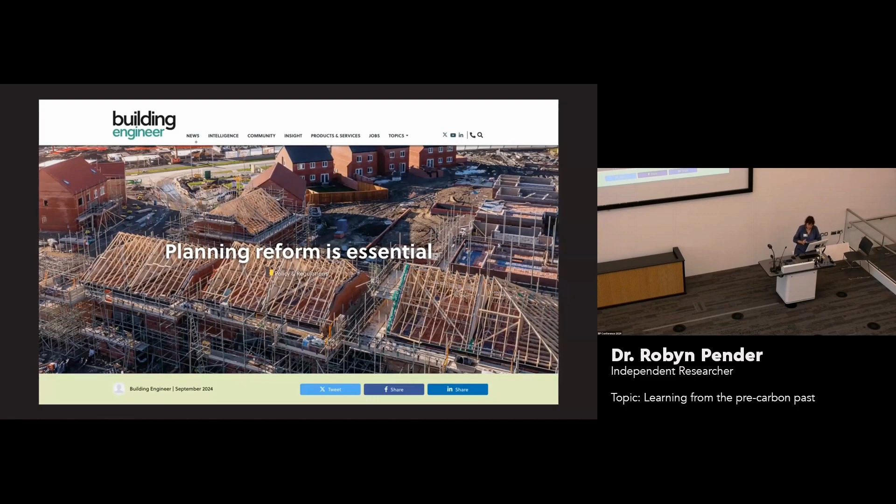This means going back to first principles in building performance and taking a much broader view of what that requires, because essentially it means looking not just at what's happening in terms of the envelope and the weather, but also crucially, vitally incorporating the people into the equation, the ways the building's being used, what the occupants are doing to support all those uses, because there's never just one occupant or just one use.

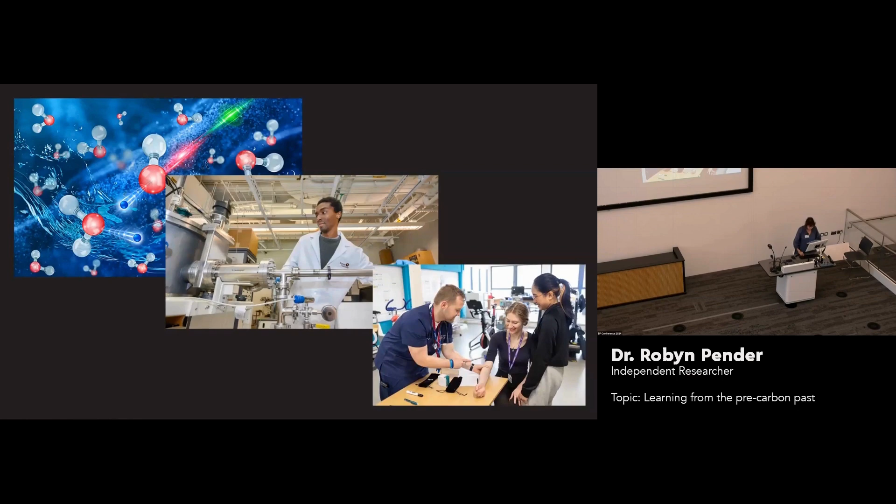There's a lot of important science behind all of this, the physics and the material science, of course, but also very much the biology, the medical science. Alas, as we've seen in the Grenfell report, we live in a world that has a strong tendency to conflate or even replace science with technology, with new toys, even though they're not the same thing at all.

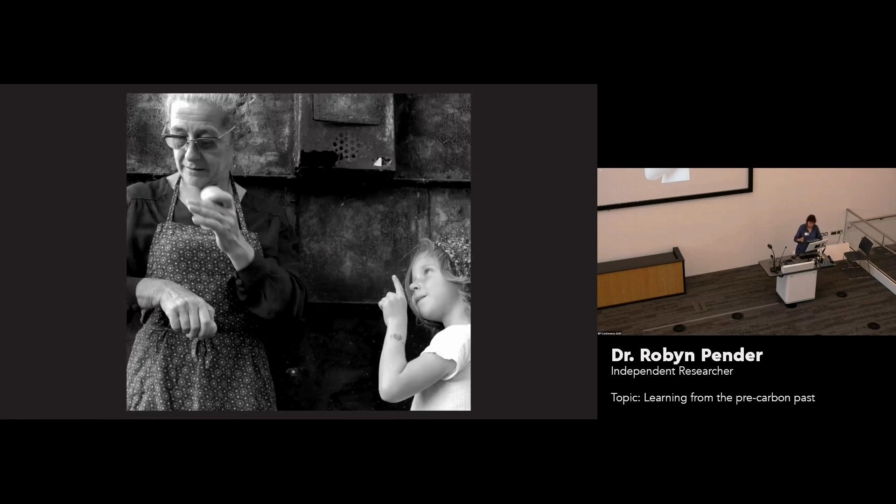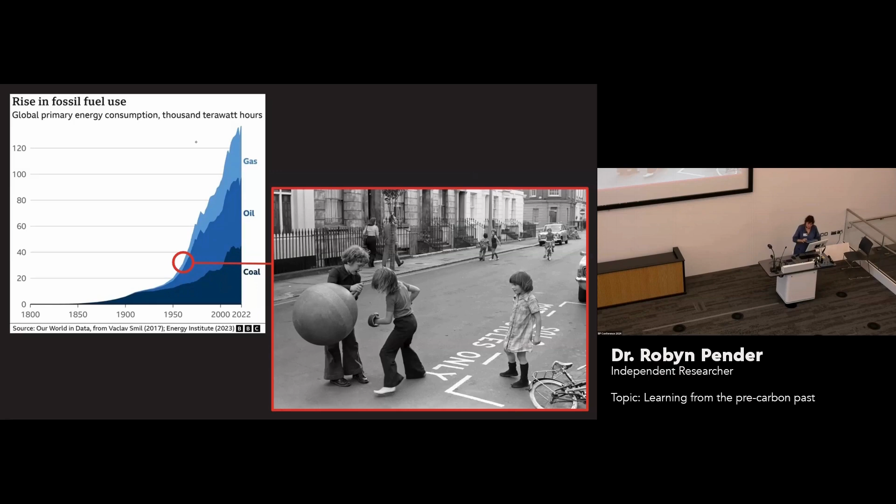I expect the medical science, at least, will be new to many people, although I guess also it really should have been our bread and butter as BP experts. Why it isn't, why it got siloed into medicine and ignored in building science, is kind of revealed by the third aspect we need to include, which on top of the science of the building envelope and of the people, we also have to understand the background history if we want to see what's been going on and why.

As specialists in building pathology, of course, we're all used to some extent to the importance of history. All of us know that the first thing to find out to understand patterns of deterioration is what's happened to the building in the past.

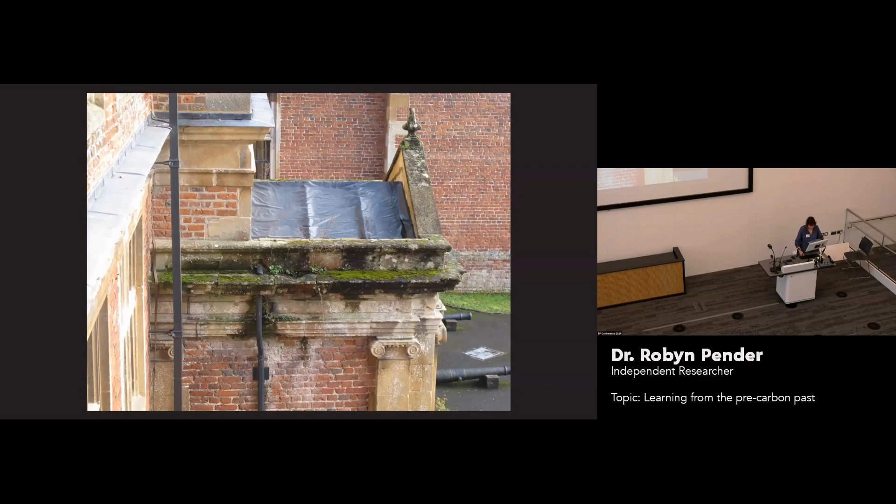We're also incredibly lucky to get the chance of working on buildings of all ages, from the very old to the very new. And that gives us an important familiarity that's really rare with materials and structures that are different to the glass facades that now dominate, and also a deep respect for just how good those older buildings can be. What I do want to stress, though, is that when people generally talk about older buildings, they seem to be thinking of these. But for me, these are all pretty recent.

I want us to go much further back into what we might call the pre-carbon built environment, when energy was seriously expensive and it certainly wasn't on tap. And that made all the difference, not just to the choices of material and design, but even more importantly to how the buildings were meant to be operated.

If you know from actual experience just how much energy it takes to prepare materials, to draw water, to make a rushlight, you don't waste. And it's waste that's clearly central to pretty much all our problems.

The deluge of fossil fuels and the miracle of energy and water at the flick of a switch quickly eclipsed hundreds, if not thousands of years of knowledge of construction and operation, and especially vernacular knowledge. And now we're paying the price for forgetting all the things that we used to know, not just in terms of climate change and all the other many self-inflicted catastrophes that are now making us feel like rabbits in the headlights, but also in terms of our own health and well-being.

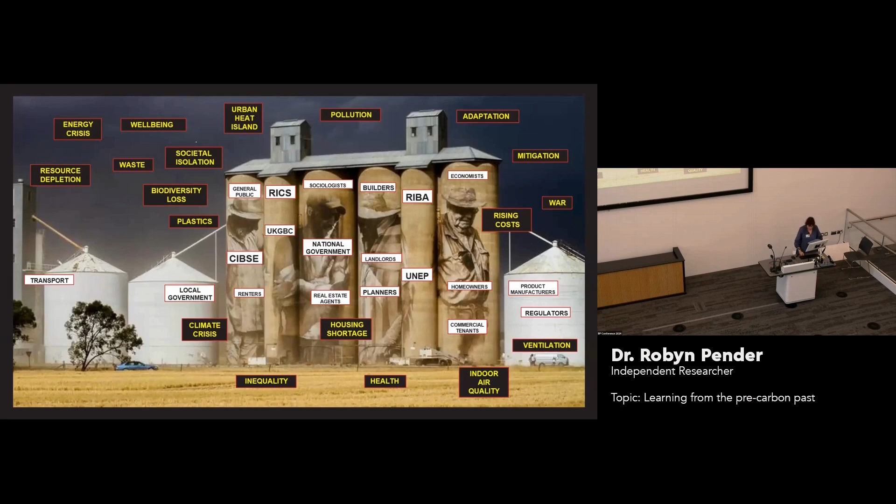Because as we know, the siloing of expertise seems to be getting worse and worse, but the built environment is complex. And so many of the things that matter most just fall into the cracks between those silos. That's in a nutshell what makes building performance assessments so powerful. We all come to this from disparate backgrounds, and that wide viewpoint's exactly what's needed.

Currently, the building sector as a whole just keeps focusing in on all those details, all the individual bits of the puzzle. But that's like a whole series of close-up snapshots, and nobody knows what anything has to do with anything else.

If we can get everyone to take a step back and look at the bigger picture more widely, more holistically, and really think about the underlying history and science, the whole panorama if you like, then suddenly it takes on a different form, and it's possible to see how everything actually interacts with everything else to make a coherent picture. So let's get stuck into that.

I'll get some of the basic building science out of the way first because it affects everything else. First and foremost, there are two basic and fundamentally different ways you can make an envelope that keeps out the weather and especially the rain. It's perhaps not surprising, they more or less equate with pre-carbon, pre-industrial, and post-carbon, the buildings that are based on materials and structures that require lots of energy to make and to run.

The old head of the Building Research Station in the UK in the 1950s, my hero Fred Measham Lea, brilliantly christened them in-house greatcoats and raincoats. And I've stolen his idea, which he doesn't seem to have ever published, unfortunately, because these names are terrific. They're a perfect analogy to help everyone, professionals and users alike, to really intuitively understand some very complex systems and easily make good decisions.

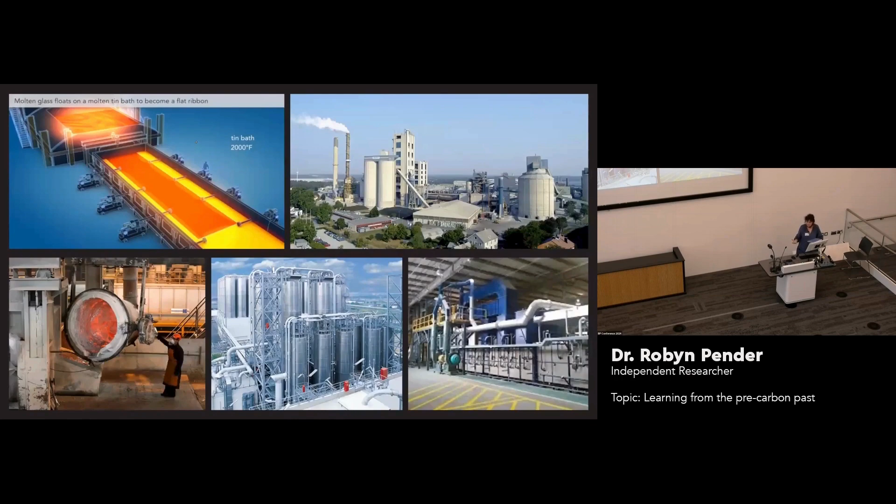It's easiest to start at this end of the timeline with the raincoat envelopes, which really get going after the First World War, probably because that smashed the old masters and apprenticeship systems for passing on knowledge. Raincoats are based on the idea of a waterproof layer using materials that are more or less impermeable, things like glass and metal and cement and engineering brick and plastic, all of which take masses of fossil fuels to make. When the water hits the raincoat, it just beads and collects and runs down under gravity.

Eventually it hits the bottom of the raincoat where it can soak in and create moisture problems. To make things worse along the way, it has to contend with the joints, and making these waterproof is really complicated because raincoat materials also expand and contract a lot with temperature change.

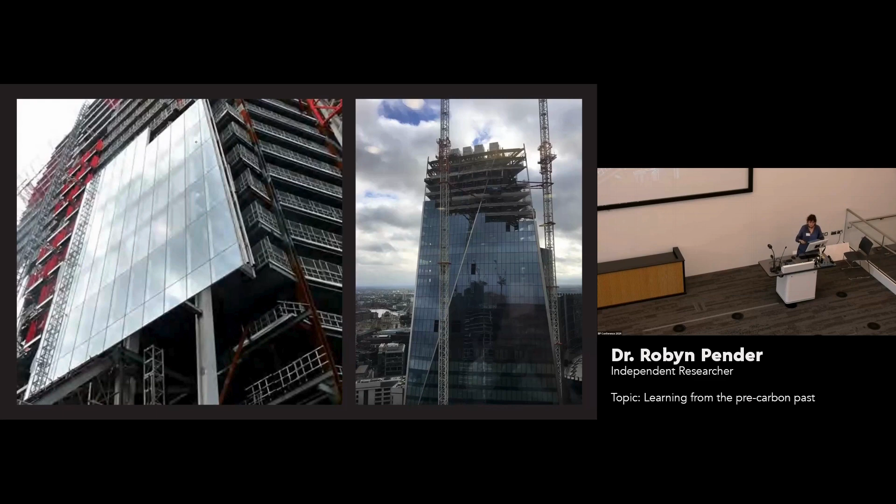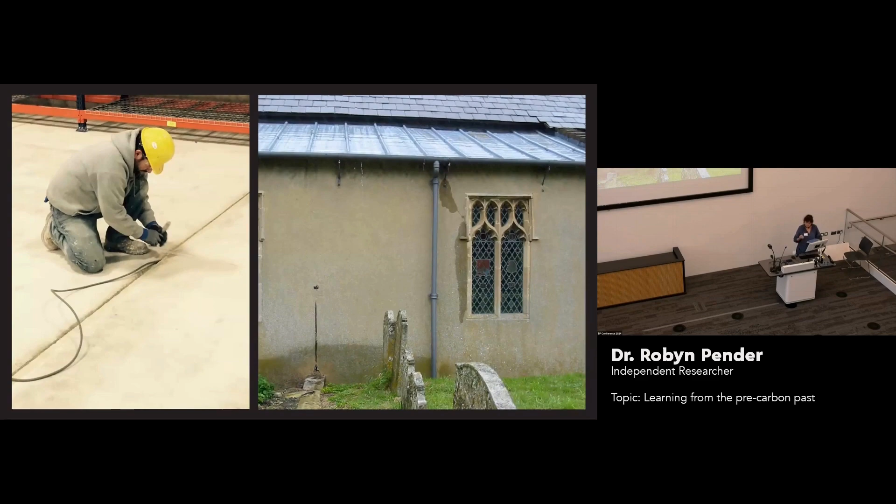So even something like cement or concrete, which you can smear over a large surface, still needs expansion joints or it will crack, unlike lime mortars. Actually, it'll probably crack anyway, and there'll be fine cracks too. And fine cracks and joints in raincoat materials make brilliant capillaries, so they suck through liquid water. The pain is, the harder you try to squeeze two surfaces together to seal them, the thinner you make the capillary. And the thinner the capillary, the better it is at wicking in the water and moving it about.

So making a joint that can take up movement and still stay waterproof is super tricky, especially at all those really complex corners and interfaces where you get lots of different planes meeting up. It's a nightmare. All this means if you're going to stop rain getting into the interior, raincoats generally need multiple layers, and all that layering makes them tricky to maintain.

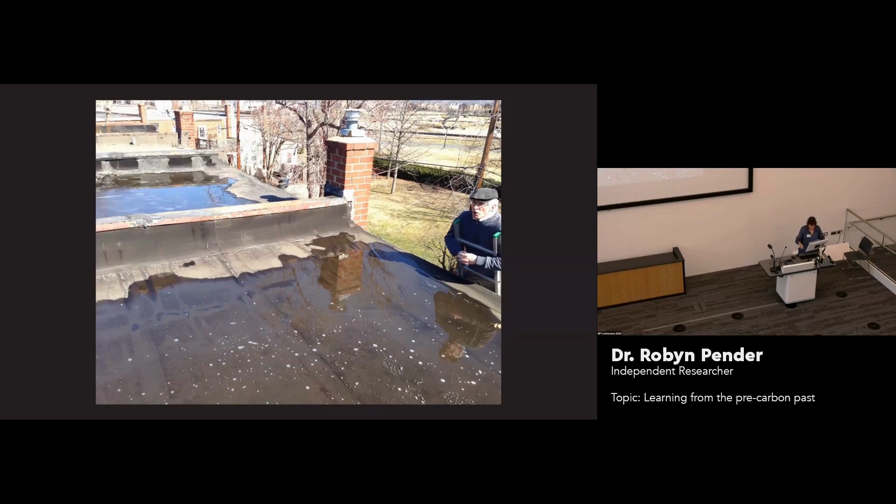The obvious examples are flat roofs. If you've got pooling water, it's probably going to wick in somewhere. And once it's inside, it's going to be moved about between all those raincoat layers. So it might appear on the ceiling a long way from where it came in. And that means locating and fixing leaks can be an interesting challenge.

And there's another problem with raincoats too, which everyone knows about who's ever worn a plastic mac in hot weather, or if the rain's got down the back of your neck. Once the rain's on the wrong side of that waterproofing, it can't get out again. And that could be penetrating rain, but it could just as easily be water from building use, condensation, or increasingly things like plumbing leaks.

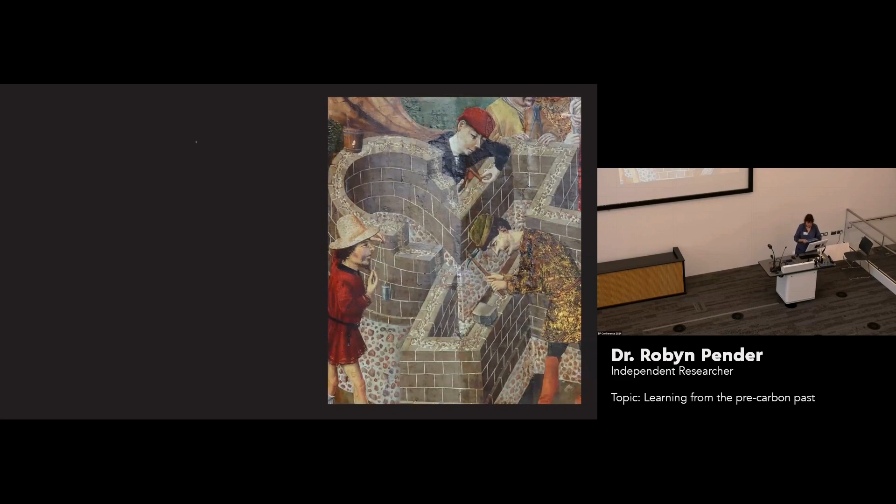Since raincoats take a lot of energy expensive materials and are tricky to maintain, I guess it's no surprise that the pre-carbon way of making building envelopes was completely different. It was greatcoats, mostly or completely made of porous and permeable materials.

Actually, we don't have a good word to describe how they work, because permeability is about saturated materials under pressure in a lab. And that's obviously nothing at all like the situation you've got in a real wall, where it's certainly not going to be dry, but the pores aren't all going to be filled with water either. So what you've probably got is some fine capillaries full of water, lots of pores full of air, and lots with a bit of a mix of the two.

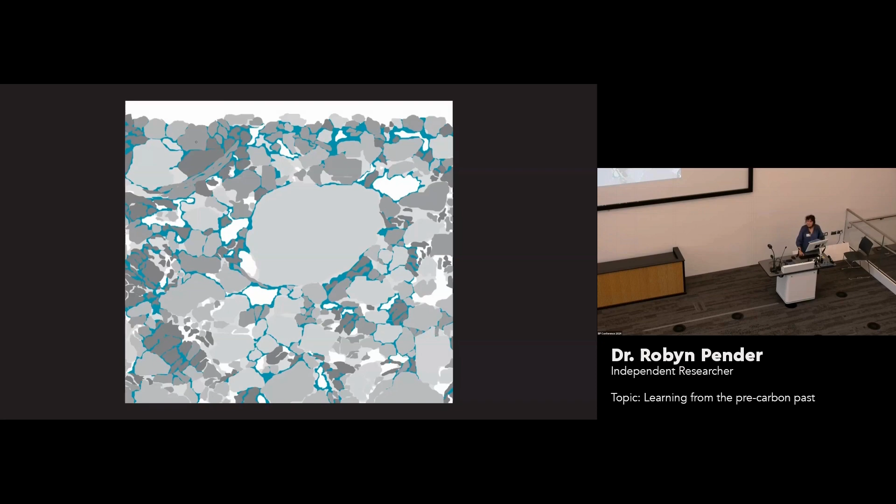So what happens when a raindrop hits a wall like that? Well, it's held in the surface pore it hits until it evaporates. It doesn't collect and flow down, and it doesn't get in further, because of the air it's trapping in the pores behind it. Air and water don't mix.

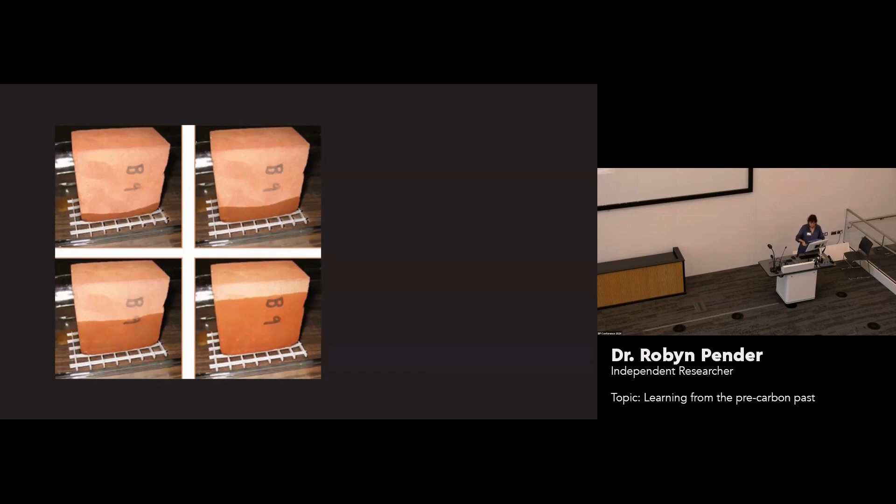It's the difference between putting a brick in a tray of water, where the air in the pores can escape and evaporation and capillary action can then pull the water through so the brick saturates really quickly, and dropping the same brick into a bucket of water so that the air in the pores is trapped by that water, and the brick will take weeks or months to saturate.

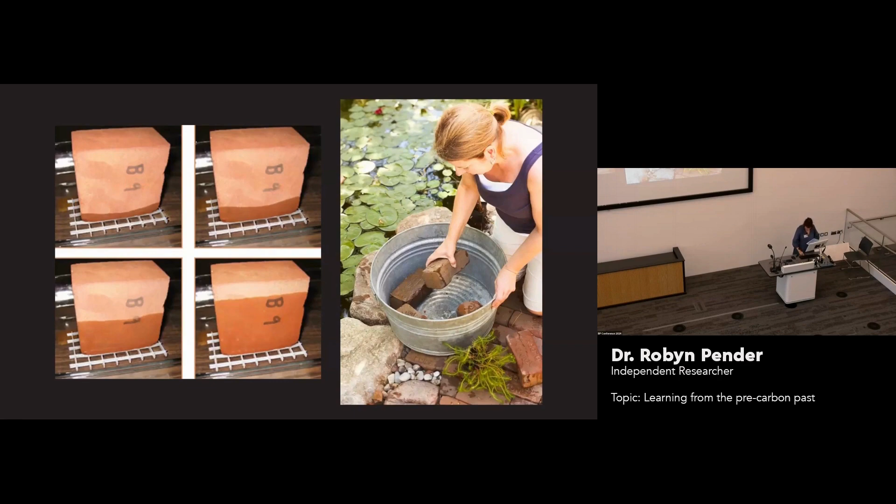And a brick in a wall is actually much more like a brick in a bucket than it is a brick in the tray. The only time a raindrop's going to get sucked into a greatcoat is if the pore it happens to hit happens to be the mouth of a capillary that's already filled with water instead of air for some reason. Usually it's something like a gutter leak or a flashing leak, letting water into the wallhead, or these days a plumbing leak.

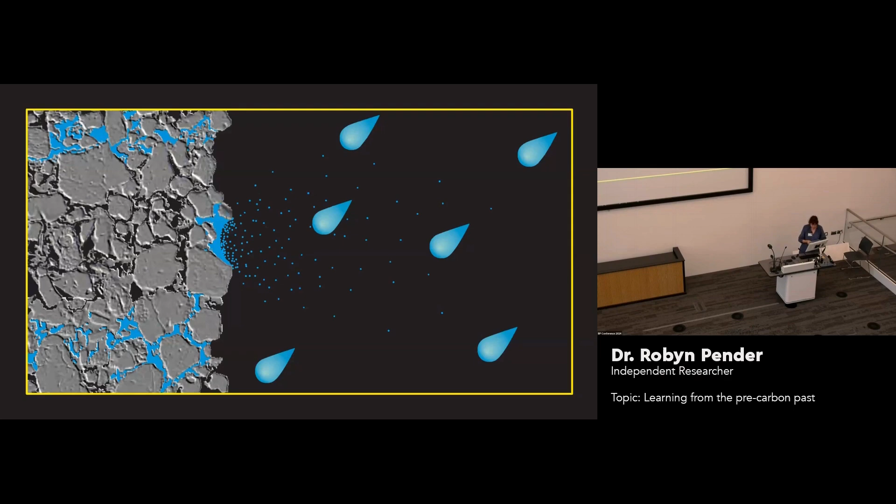Then the liquid water that's already there will entrain it. But as long as your building's in halfway decent condition, that's not going to happen very often, which means that the key to keeping a greatcoat enclosure working isn't at the surface, it's at the building scale. It's making sure that all that protective detailing is there to stop the rain getting into the fabric so you don't get too many capillaries filled with water.

So all those wide eaves, gutters, flashings, hood moldings, sills and drips, renders and lime washes, and so on. And vernacular architecture worldwide is characterized by these features because they work.

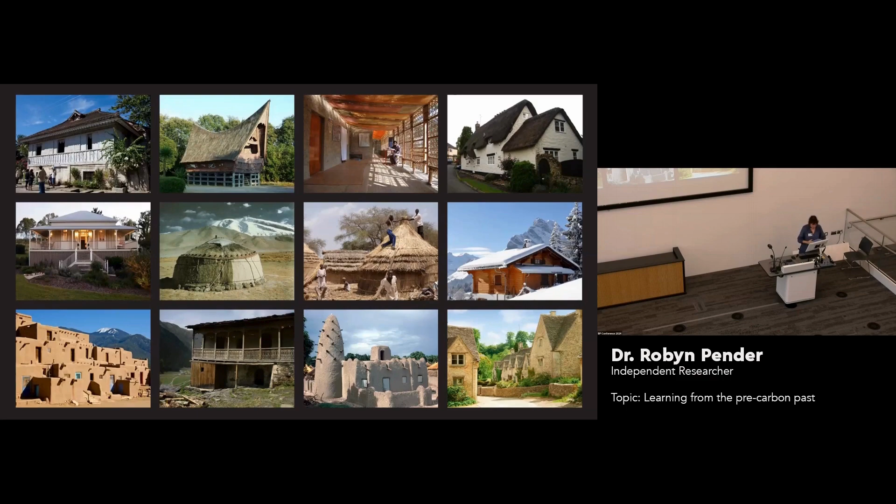Having water filling some of the capillaries out onto the surface isn't entirely negative, actually. In fact, it's critical to humidity buffering, the ability of greatcoats to modify swings in humidity. That's all about the water-filled pores at the surface, grabbing hold of the water vapor from the air when it's humid and letting it go again by evaporation when the humidity drops. If the fabric were perfectly dry, it wouldn't buffer, as Tim Padfield's shown.

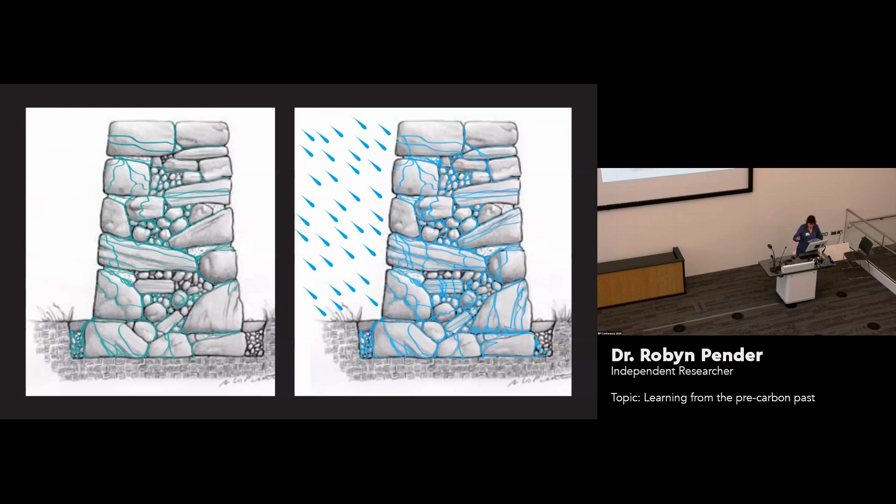But since any real wall is never going to be dry, we have a naturally great system. If water does get in too, that same system of capillaries can draw it out to the surface again so the wall can dry. We do need to remember, though, that the drying process itself does create more water-filled capillaries to the surface. So if your building's a bit neglected and water's getting into the core, then it's more likely that rain hitting the wall will be drawn in, and that creates more moisture-filled capillaries, so it's a bit of a vicious cycle. But even a very neglected building can dry out again. Once the source of that water is found and fixed, we've got plenty of evidence of that.

Where we really get problems is when someone tries to turn a greatcoat into a raincoat by covering a wall with something like a cement render or a plastic paint or a hydrophobic coating. The rain runs down the surface, then whenever it meets a small imperfection, crack, it's very likely to be sucked in. But the coating slows it getting out again, so the wall gets wetter and wetter.

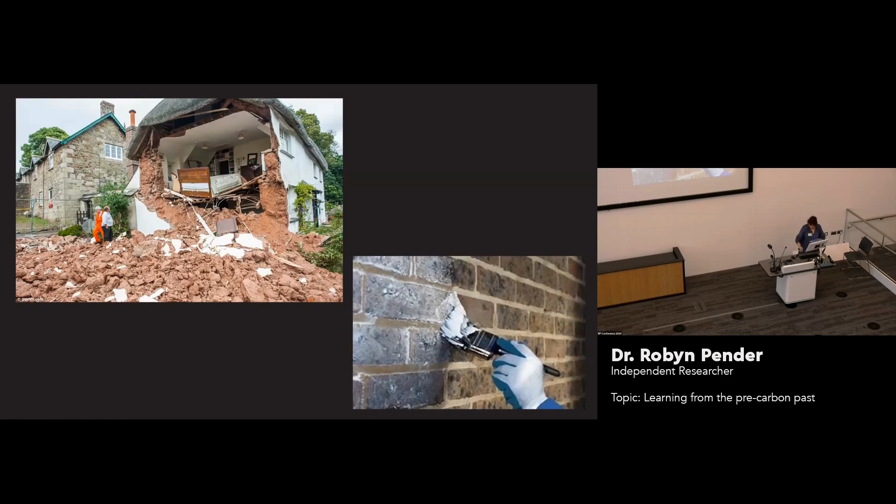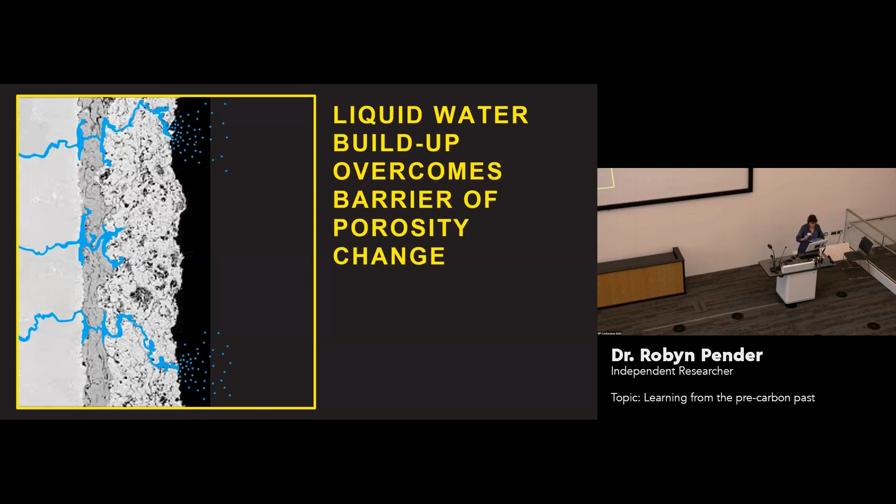And of course, any water getting into the wall from any other source is also trapped. It's really common to see blistering because the coating makes the pathway for water to the surface much more convoluted. So water builds up under the coating until there's enough of it to fill the pores and percolate around and find a way through to the surface.

Once it gets to the air, evaporation can then draw it through really super quickly. And that's kind of like tugging on a train of sausages, I think. The speed of evaporation breaks the liquid flow path, and that stops drying until you get enough water building up again to repeat the cycle.

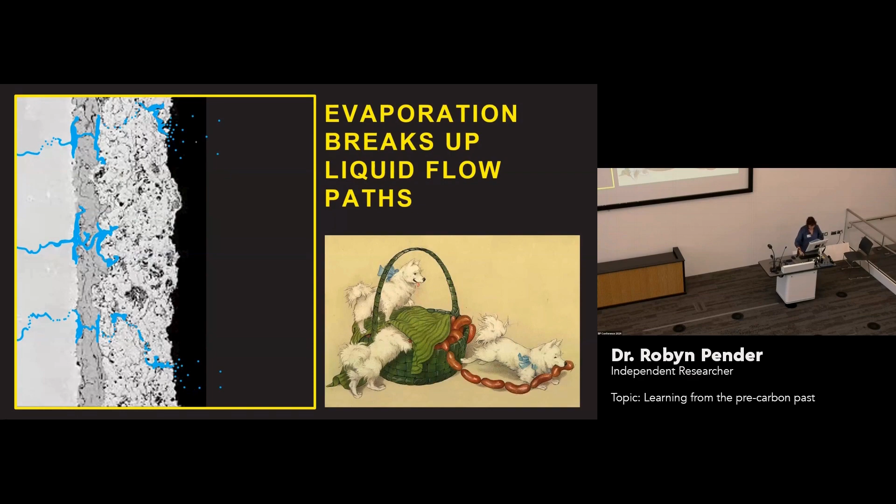But each time you break a liquid pathway, all the salts that are being carried by that liquid water are going to be deposited. So it's the ideal conditions for salt cycling damage under the coating, which is, of course, exactly what we see. Clearly, the phase change between liquid and vapor is a big part of the moisture story.

But unfortunately, there are lots of misconceptions around vapor at the moment, especially when it comes to the models used for some insulation calculations. Not least, there's an idea that vapor can and does pass through permeable materials, so it's worth setting out the reality.

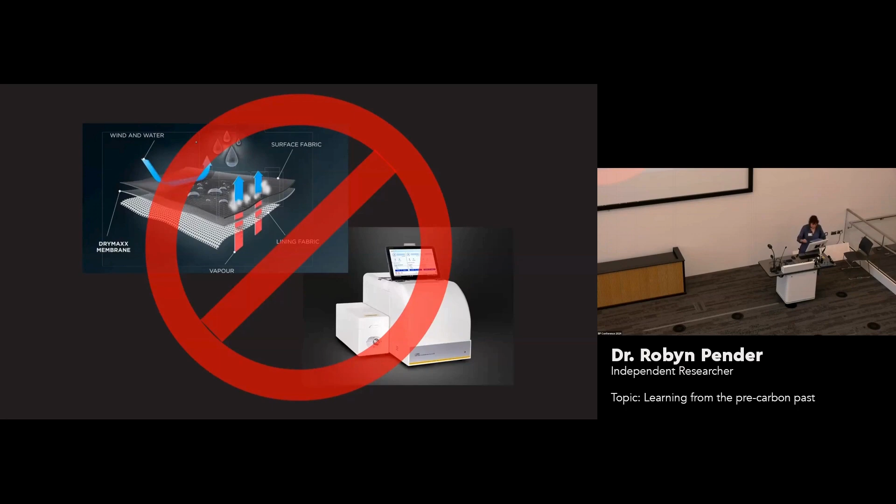With thermodynamics, you can easily show that vapor molecules can't get through porous materials and that the vapor transmission tests are actually recording the transfer of condensed liquid. But perhaps it's even more convincing to get this across to people who aren't BP experts if we just set it out in first principles. So when it comes to vapor transfer in free air, it's of course absolutely the case that water molecules move from areas of high pressure to lower pressure.

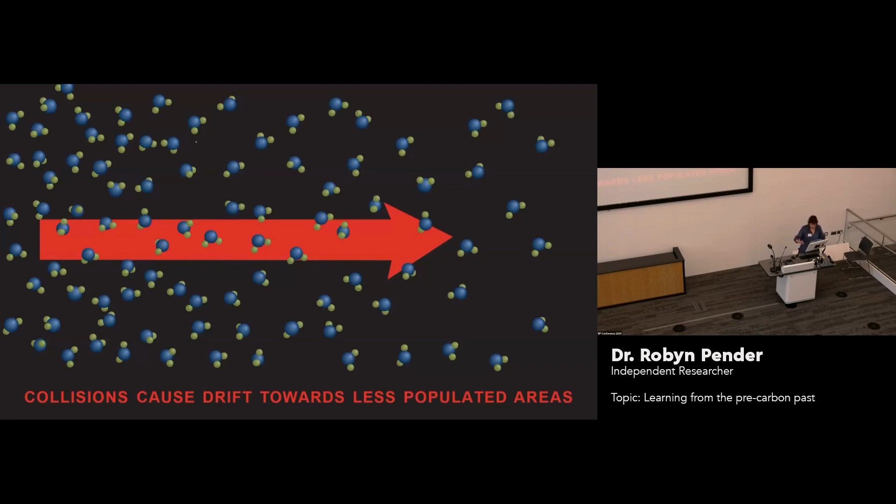That's just the natural result of collisions over time. But I think there's a common misconception out there that individual molecules somehow make a beeline for lower vapor pressures. It's inherent in the Rowley-Glaser model, which suggests that vapor pressures on either side of a wall will drive vapor through it. Well, if you're thinking of the big voids in rain screen walls, you might get some mileage from thinking of vapor moving from void to void through big gaps.

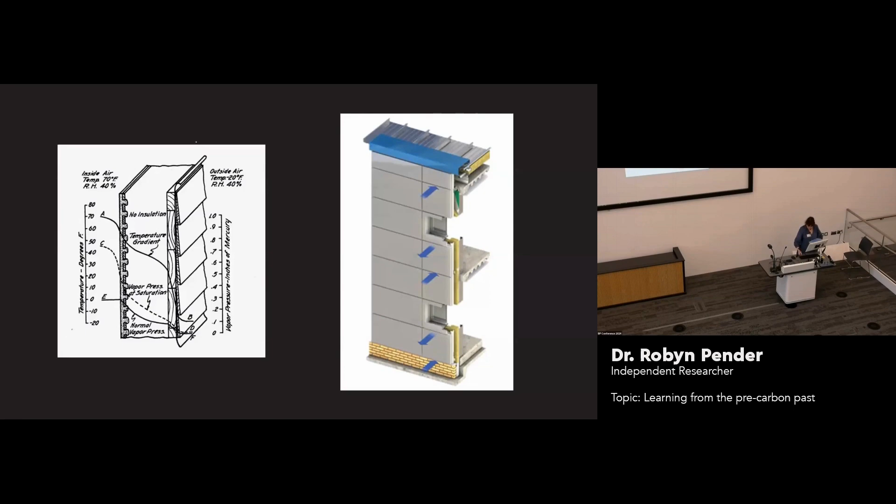But it's not useful at all for water vapor in pores, even in so-called vapor permeable membranes. If you imagine a water molecule in the air traveling into the pore of a porous material, it'll keep going straight until it hits a pore wall, and then it's going to lose some of its kinetic energy. If it doesn't condense immediately, it'll bounce off and head in a different direction until it hits another part of the pore walls, losing more energy.

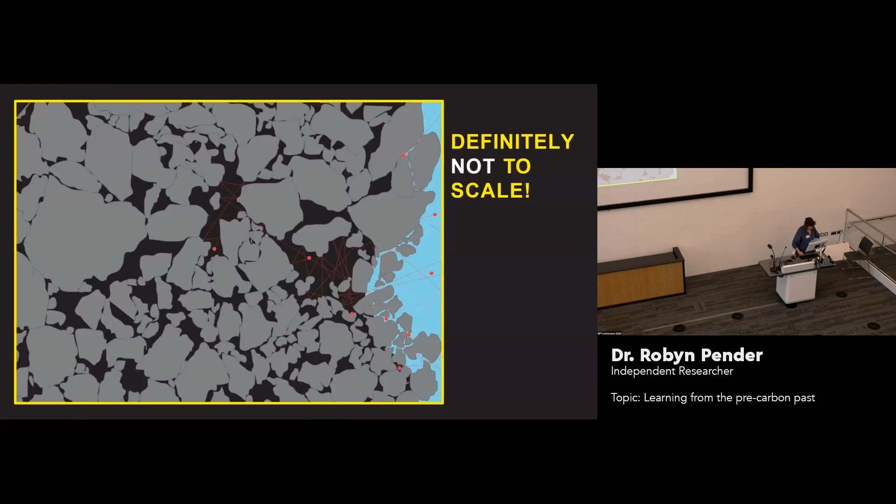So condensation happens really quickly. Vapor getting in from the exterior is going to condense within the first pore or two from the surface. But that molecule might attach to other condensed molecules or water already in the pores. The resulting liquid can easily be moved around the pores by capillary action, gravity and percolation, and might even be drawn right through the material and evaporate out the other side.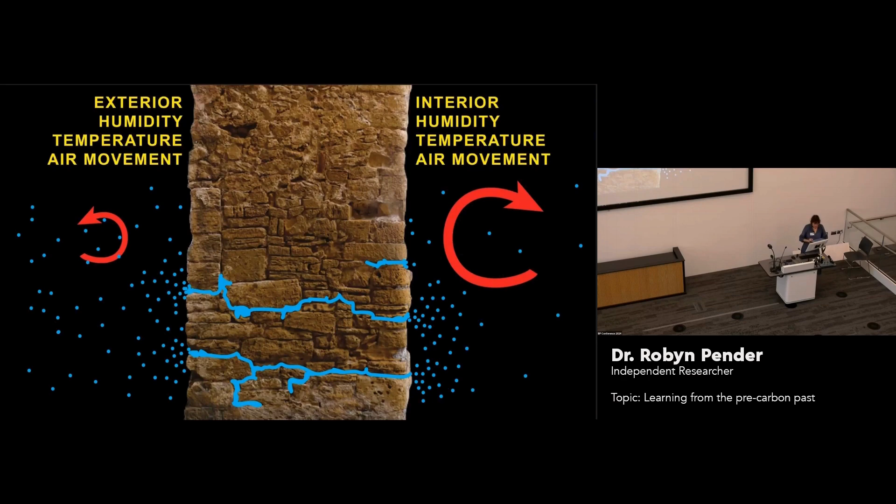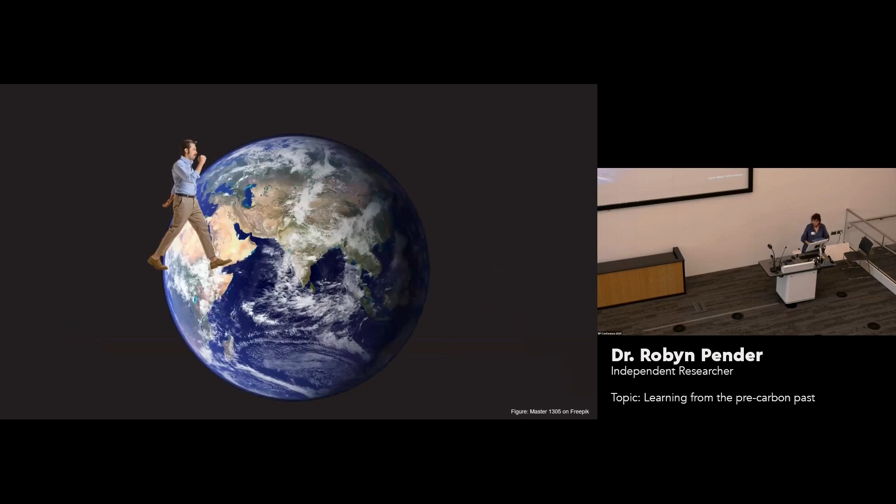This is what happens with driving rain. But it's only going to move in the liquid state, not as a vapor, no matter how thin or porous the material is. If you compare the tiny size of a water molecule to even the thinnest Gore-Tex membrane, even if the molecule somehow magically traveled in a straight line without colliding with anything, which isn't going to happen, the distance it would need to travel is equivalent to a person walking once right round the equator.

So if you could look inside the pores, you'd see molecules evaporating and condensing all the time, but that's completely independent of the conditions outside the wall. The water vapor inside a pore will only see the immediate pore walls and contaminants, only its local environment. The relative humidity, temperature and air movement outside aren't going to have any effect. But if you've got liquid flow paths connecting to the exterior, then exterior conditions can certainly drive movement of water. And that's not just semantics.

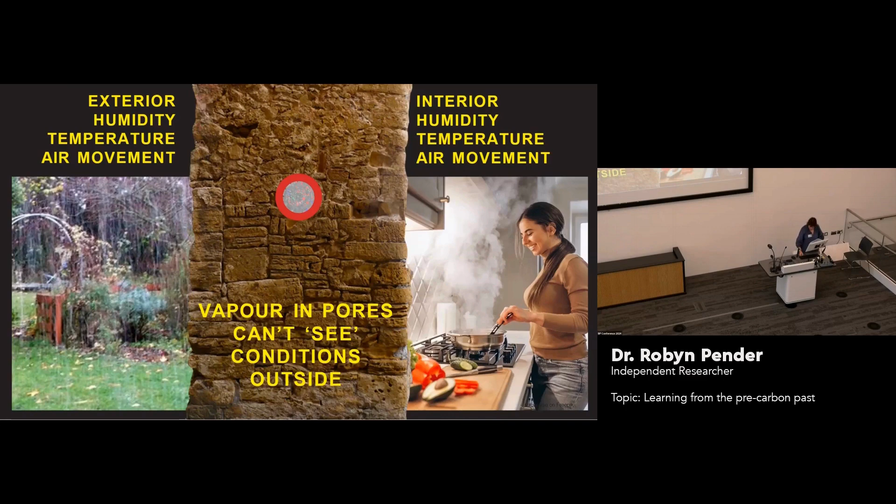The difference between liquid and vapor is critical for understanding drying, because to get water from the core of any material out to its surface, you need an unbroken liquid flow path through a capillary or interconnected pores. Just like overcoming the barrier of a surface coating, the moment you start to remove water from the surface faster than it can travel from the core through what's probably a pretty tortuous pathway, you risk breaking that liquid flow, and drying essentially stops until natural processes like condensation and percolation reestablish that liquid continuity again, hence stage 1 and stage 2 drying.

Which is why building performance expertise is critical for explaining to impatient clients why slow and steady actually wins the race when it comes to drying walls after flooding.

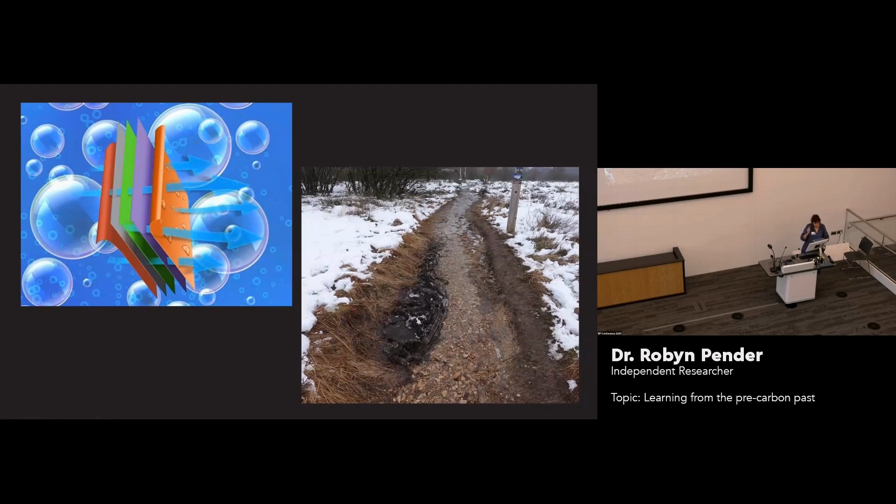The realization that models like Glaser are quite wrong in terms of the physics does raise the question of building membranes and what it is they're meant to be doing. I think the answer is it's often unclear what their intended purpose is. People are adding them in just in case, which is actually really dangerous, especially for greatcoats. And even when the purpose is clear, like keeping rain out from insulation, it's not necessarily clear that they're really up to the task.

Perhaps with enormous care and attention to detail, you might get a couple of decades out of the best of them. But what does that mean for care and maintenance? How would you know when this membrane was starting to fail, and what would you do when it did?

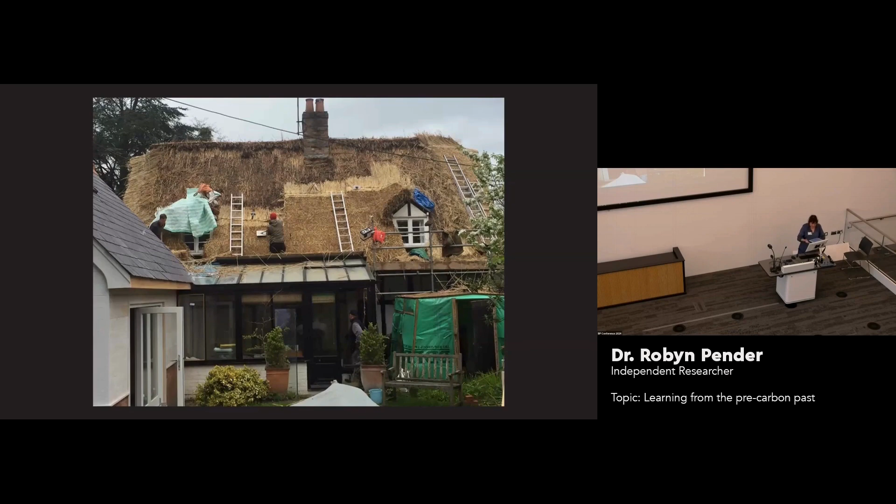So for me, that raises an important general point, which came up yesterday too. For all materials, old and new, that we might want to use on a building, I would argue that as a minimum, we really have to know as much as we possibly can about its failure modes, so we can say whether or not it's the right material to use in any particular case, and then what we need to put in place for future care and repair.

Leaving this to the manufacturers just won't cut it. It needs building performance expertise to see how any addition behaves as part of a system out there in the real world. The big reason we're so confident about traditional materials and systems is that we do understand what makes them fail and how to prolong their lifespans quickly and easily.

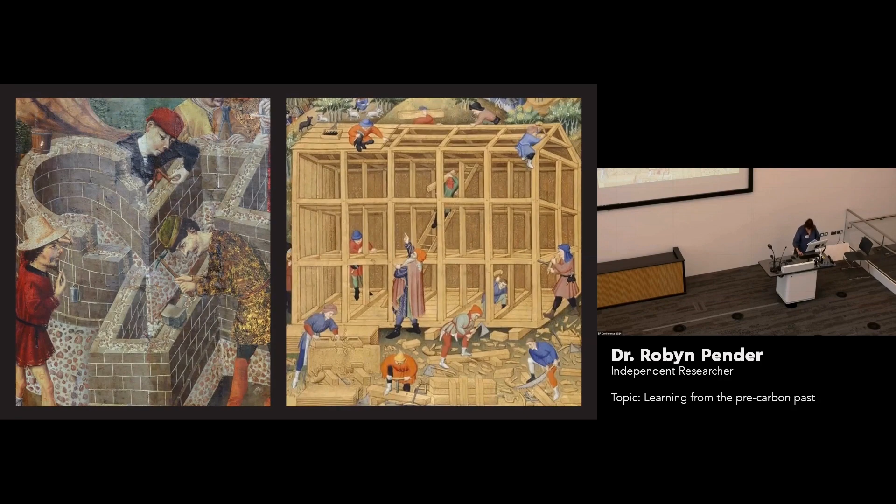Having established that greatcoat systems do work brilliantly, you can understand why they were the only way of building envelopes until very recent times. Raincoat materials like lead sheet first appeared very rarely and were used very sparsely.

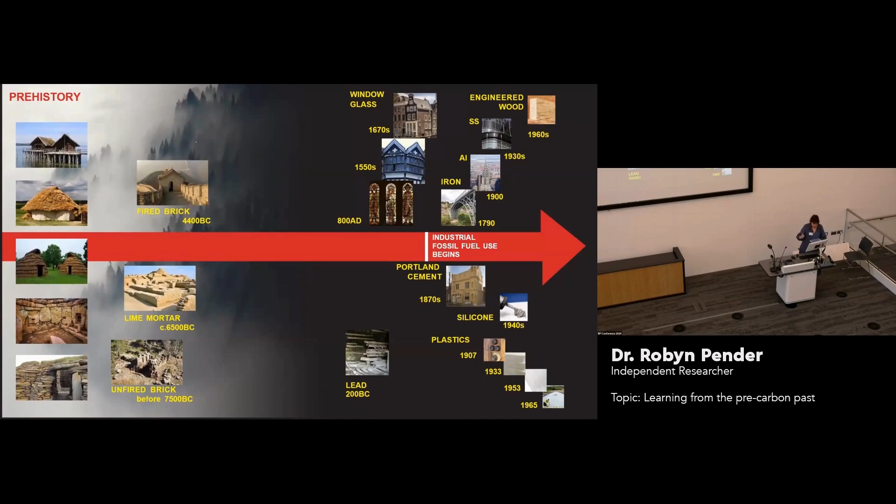One of the things that's so striking to modern eyes about this timeline is how terribly late glass comes in as a material. It's so common to us now that we assume it's always been there. There are some really excellent reasons it didn't appear earlier. The chemistry and technology are incredibly complex, but the essential problem is how much energy manufacture takes. That made it phenomenally expensive.

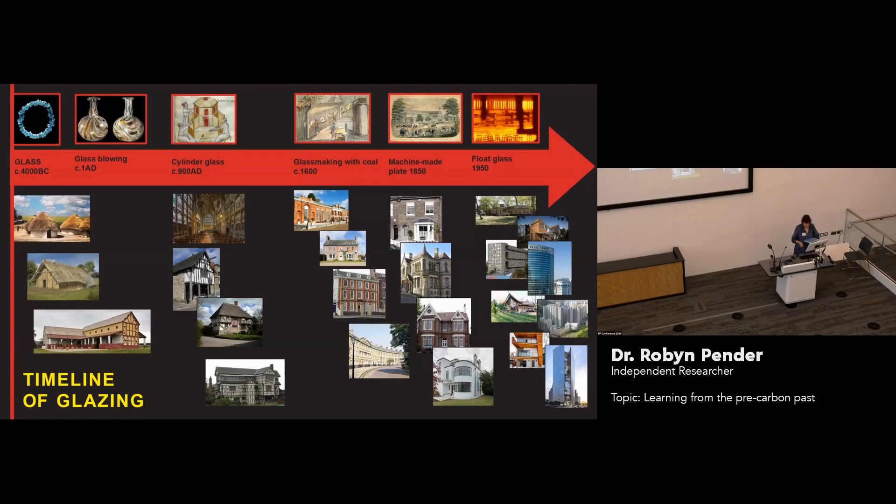And for the first few hundred years after window glazing was invented in about 900 AD, it was pretty much exclusively the property of the church.

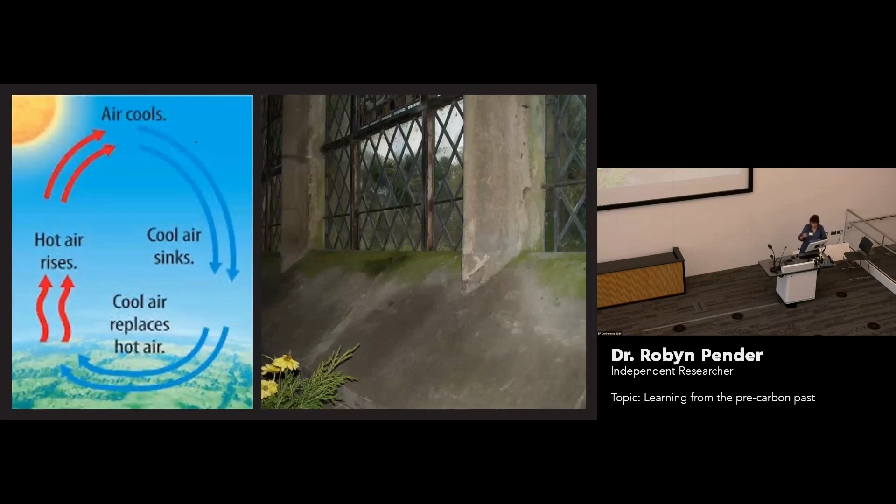They also, of course, got new problems of discomfort for the occupants, especially downdrafts caused by the interior air being chilled where it met the glass. But they worked out very quickly what to do about that too, as we know, because we have thousands of wonderful medieval images to show us, even though they never actually bothered writing it down, because it was something everyday. It made simple common sense to them.

But before I point out to you exactly what it was they did, we need to dive into some medical science, as I promised. And it's thermal physiology, how we physically interact with our surroundings to keep our metabolic processes working properly, to keep us alive, in fact. We in the buildings world seem to have developed some really weird ideas around this over the past 100 years or so. So again, it's very much worth going back to basics.

The basic thing is that we aren't like cups of coffee, just passively losing heat into our surroundings until our skin's at the same temperature as it would be if it were just thermodynamics, although most of the modeling assumes that's how it goes. Actually, we're warm-blooded, and like all warm-blooded animals, we're the heat source. We evolved an incredibly complex thermoregulatory system designed to turn most of the food and oxygen we take in into heat to keep our vital organs at exactly the right temperature to work properly.

If the brain, the heart, the lungs, and so on go outside a really narrow temperature band, it's less than a degree either way, the cells start to die and so we die too. But since we're continually generating heat, we will always need to be losing some of it, even if it's very cold, just not too much. So we have incredibly clever control mechanisms for getting that balance right. And it's a dynamic balance. It's changing all the time as we move around, as our surroundings change, as we do different things.

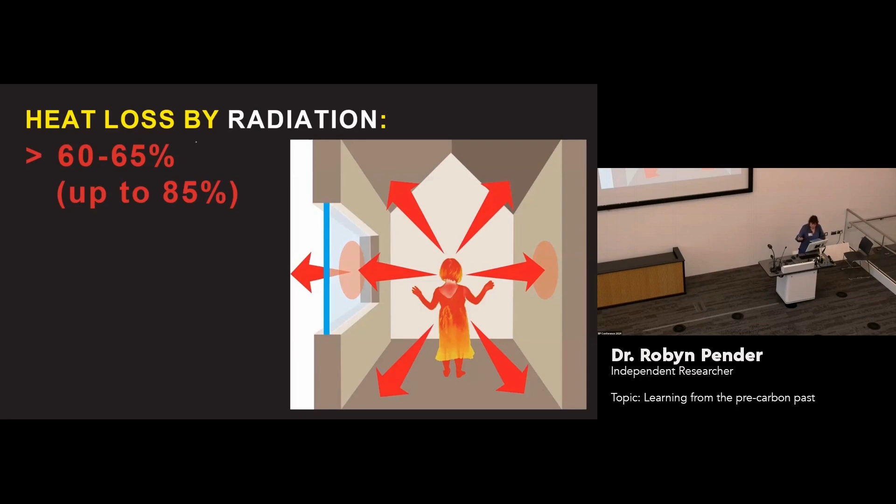That's at least 60–65% of our heat loss. But if we're wearing light clothing and we're surrounded by surfaces that keep absorbing our heat—glass, metal, stone—that can go up to as much as 80–85%.

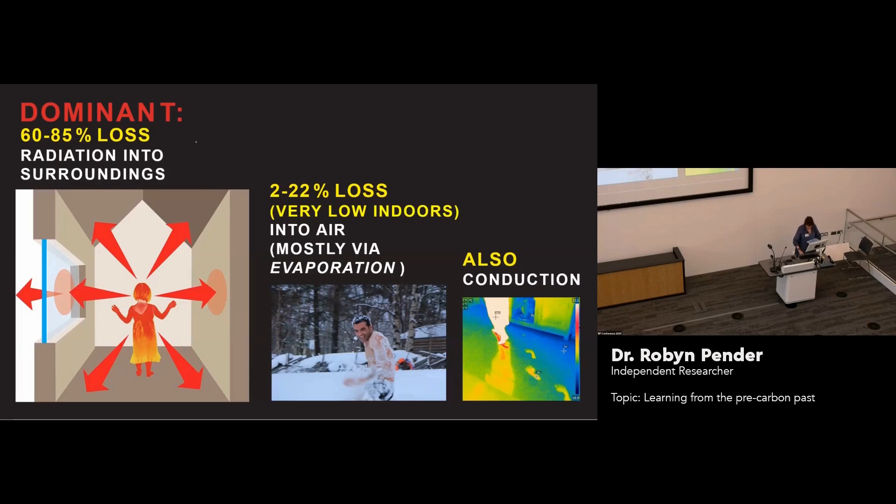So at the moment, we concentrate pretty much exclusively on that tiny amount of heat we're exchanging with the air, even though radiant loss is infinitely more important for comfort. Currently, it's almost entirely neglected in the way we design and operate our buildings in the global north, which is predicated on controlling air temperature. But that's a red herring.

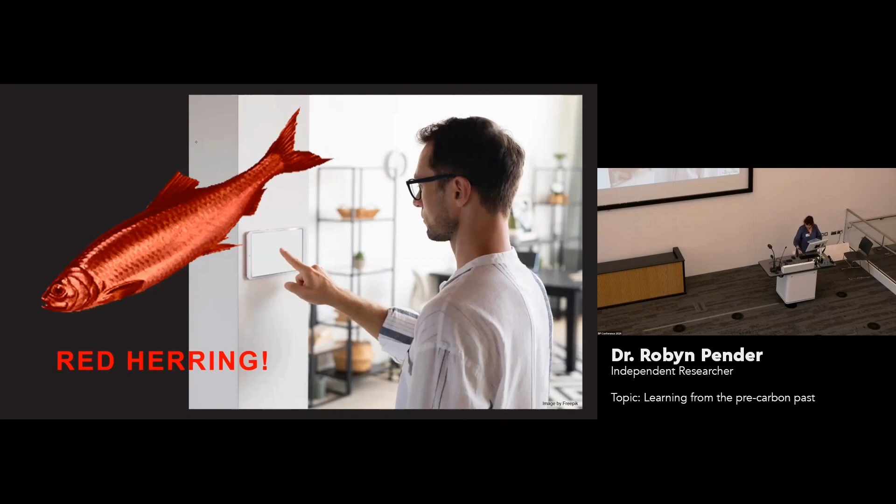Pre-carbon, they took an entirely different but extremely effective approach to thermal comfort that was almost entirely passive, which is our cue to introduce the strand of history.

Now, in the pre-carbon past, no, they didn't use fireplaces for thermal comfort, except incidentally. That's a post-carbon idea—it's Victorian, and it's perpetuated by a million video games and television programs. The genuine medieval images show us the enormous fireplaces being used for tiny fires for cooking. They are that size to make sure they got rid of all the combustion gases.

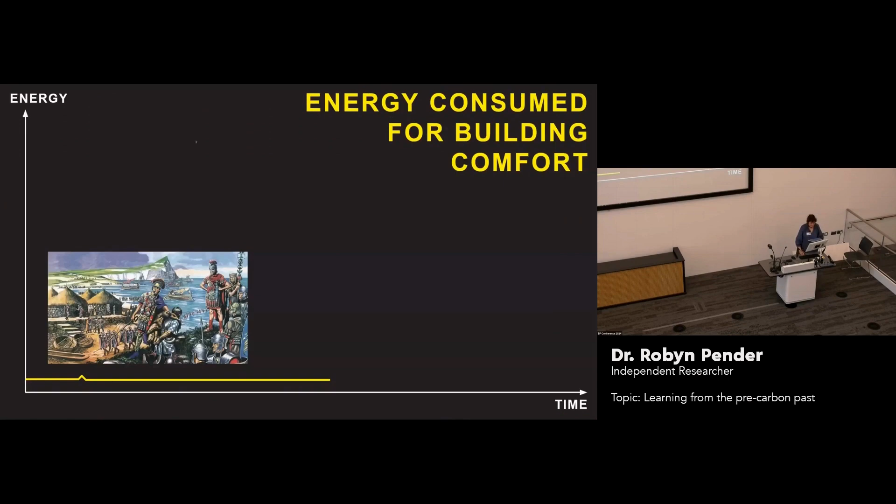And when they're not used for cooking, the pictures show us they were sealed over with panels, settles, and cloth. Now, we did get a bit of a blip in the UK of energy being used for heating when the Romans came to the frozen north.

They didn't know how to build for the British climate, and they didn't know how to dress for the climate either. But instead of following the natives with their trousers and thick earth walls and those passive tricks I'm going to get onto, they decided to try and transfer the hypocaust system from their bathhouses back in Rome into their ordinary villas in England.

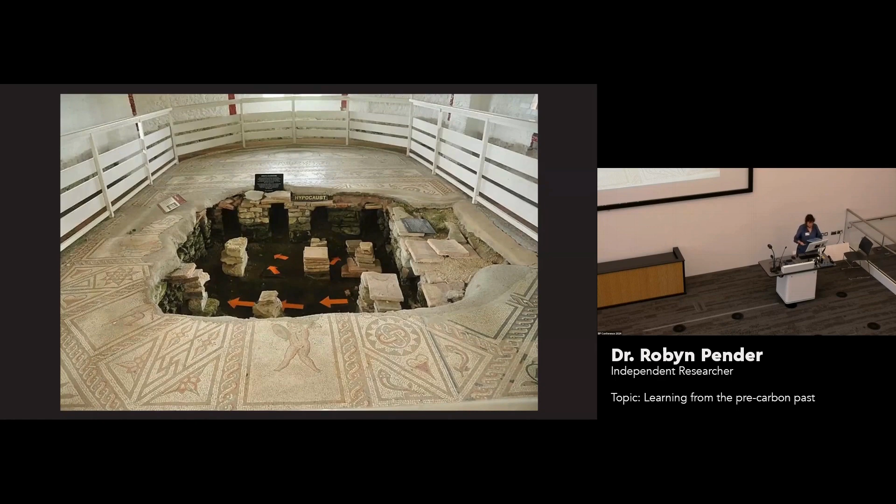The Romans are just so much like us in so many ways—the original global north know-it-alls, addicted to technological solutions to non-technological problems. They used so much charcoal, burnt so many trees to run this. It was really completely unsustainable, and it actually won't have worked all that well.

So it's no surprise that when the Romans left, the locals went straight back to what they'd been doing for centuries. And what they were doing and kept doing was this: slashing that huge component of radiant loss directly by just putting up simple barriers between their bodies and all the heat-absorbing surfaces around them.

They used draperies and canopies and rugs that could be put up in winter and stored away in summer, when some radiant heat loss was actually really useful—and not necessarily over all the surfaces, often just where people were sitting working quietly.

Even better, the draperies weren't one-trick ponies—and I think when energy is costed properly, you don't have one-trick ponies. At the same time, they could be using them for draft control, to stop or channel air movement, that next big contributor to comfort and discomfort.

And that's what they did with those new glass windows for the churches. They hung their wall draperies right across the bottom of the windows to catch the downdrafts, which is why the medieval windows have such steep internal sills, which used to puzzle me.

And all this drapery was clearly effective. By slashing that biggest contributor to thermal discomfort without worrying about air temperature, they could and did open their windows even in winter—and we can see that from the paintings, that's exactly what they're doing. And we also know from what they wrote that masses of fresh air was exactly what they wanted too.

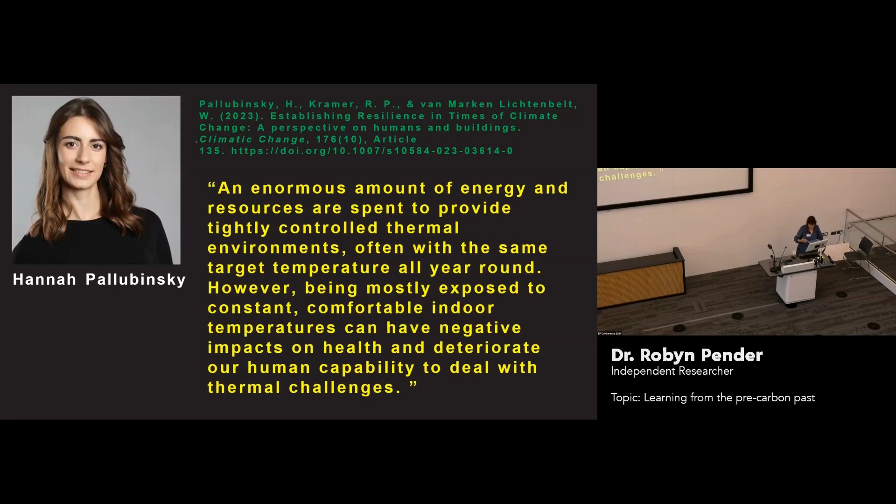So it's probably no accident that the increase in these conditions in the global north mirrors the increasing control of interior environments. And if that's not enough, thermal physiologists are also pointing out that we're more comfortable too if we're exposed to more changing conditions, because the thermoregulatory system is use it or lose it.

So if you pickle yourself in controlled conditions all the time, it closes down, and it takes a while to start it up again. And if it's not working, that means you feel all the slightest changes in your thermal surroundings that a well-functioning system would just neutralize without you even noticing them.

And anyone who's ever been camping knows that really well. For the first few days, you feel every change in your bones, but after that, you barely notice them. And that's not psychological, it's physiological.

But what happened to the draperies? One minute they're everywhere, and the next minute they're pretty much forgotten. Well, I think a number of things are happening at the same time.

Fossil fuels played a really strong role. Draperies disappeared around the time of the Great Plague, since people knew the plague's spread was associated with fleas, which gave draperies a bad name. They must have also become unfashionable. They'd probably have come back again, but this is the century of the Industrial Revolution and the Enlightenment.

They'd started to make glass with coal, which made glazed windows affordable, so building envelopes started to change dramatically. But unlike making bricks or lime, making glass wasn't a local activity. It needed not just masses of energy, but also special materials.

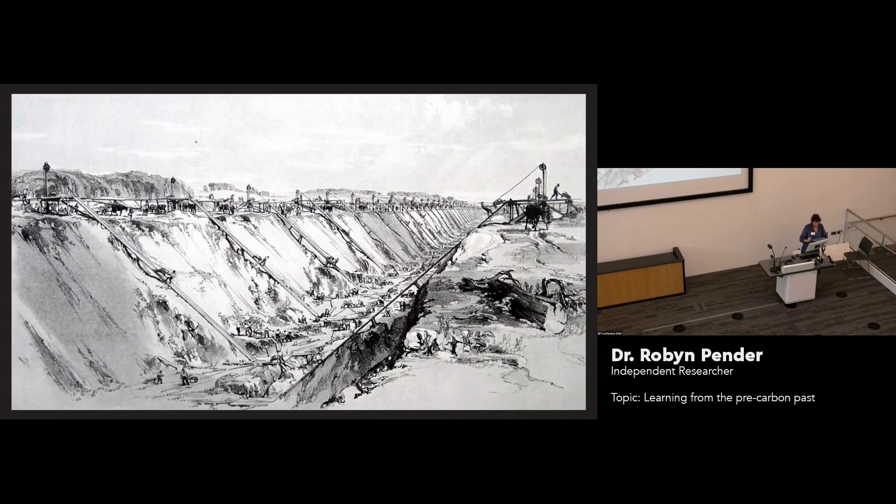They had the new canals, which meant they could transport the coal, sand and other raw materials from one place for making the glass, and then send that finished product off far away to market, no matter how heavy it was. And of course glass is heavy. But all this meant glass had to be made by a company, an entrepreneur, and that commodity-led approach to building is something quite new.

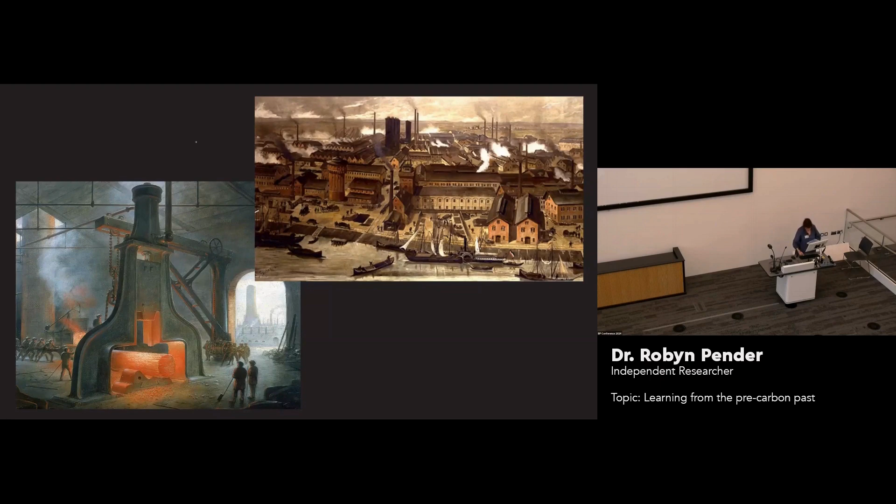It's terribly important for us to understand that history of energy in buildings. By the end of the century, they'd worked out how to make iron and steel with coal too, and once they had, we were really on a high energy journey, because with iron you could dig more coal, build more canals, buy more coal, make steam engines for manufacture, steamships, trains for transport, and the money rolled in for the new industrialists.

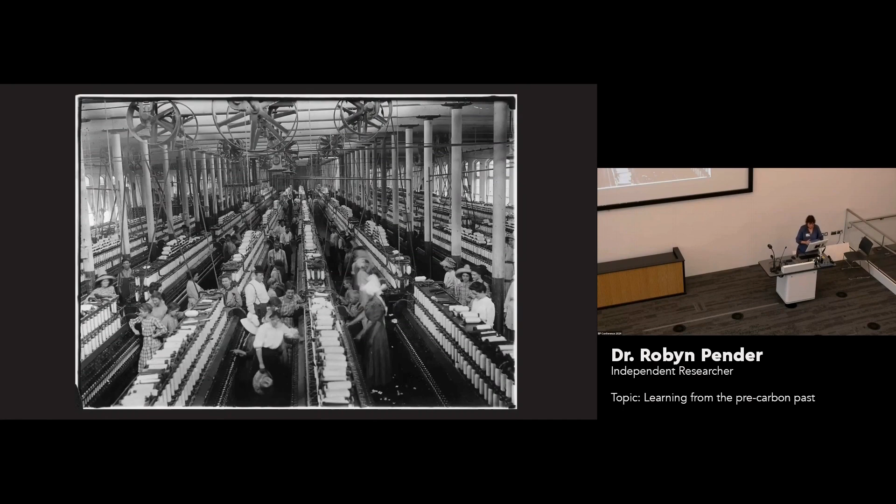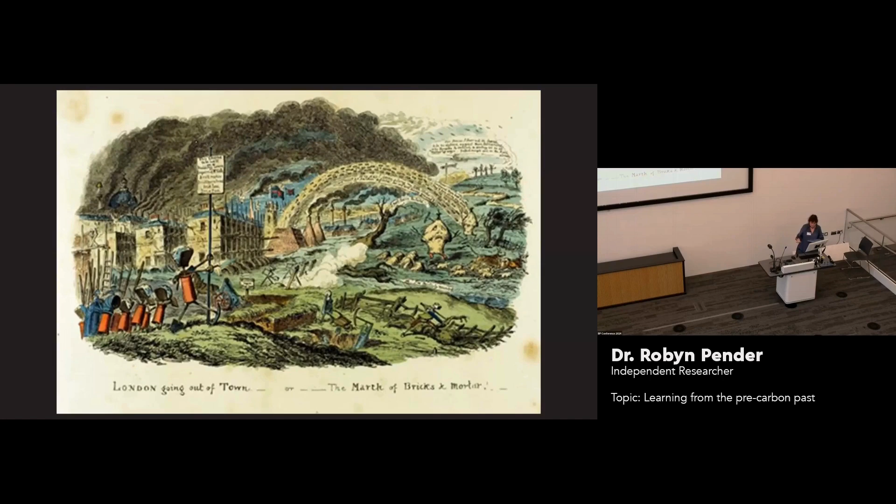But they needed people to man their factories, so they cajoled and bullied them off the land and into the towns. Those people needed housing, which expanded the market for the new building products. The new entrepreneurs started looking for new ways of making buildings that would create more markets for their materials. So it was out with the old, tried and tested, localized and well understood, and in with the innovative and product-centered.

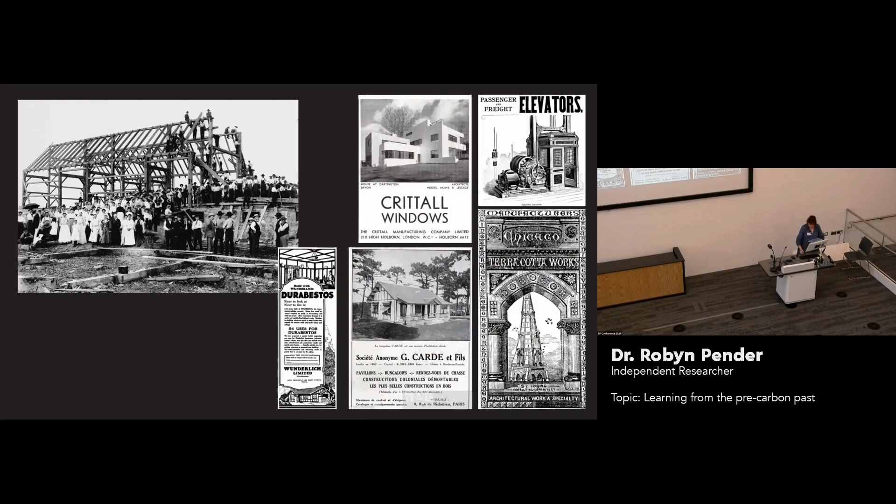Finally, you have the beginnings of the fashion for technological solutions. Beforehand, nobody much cared about air temperature, because from experience they knew what was causing their thermal discomfort and how to fix it. But at the beginning of the 18th century, Fahrenheit invented the first practical thermometer, and that caught the imagination of the scientists and engineers of the Enlightenment, who cast around for ways to use this brand new toy. They developed new theories of comfort, and finally all sorts of inventions intended to heat or cool the air.

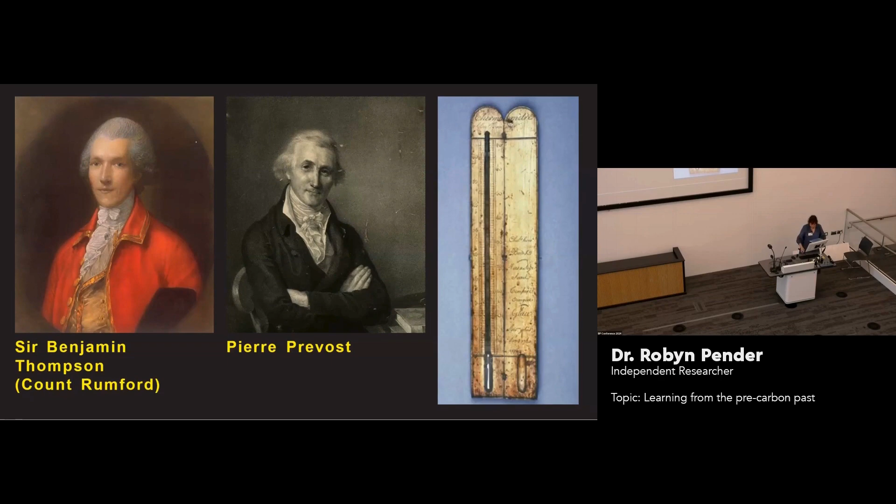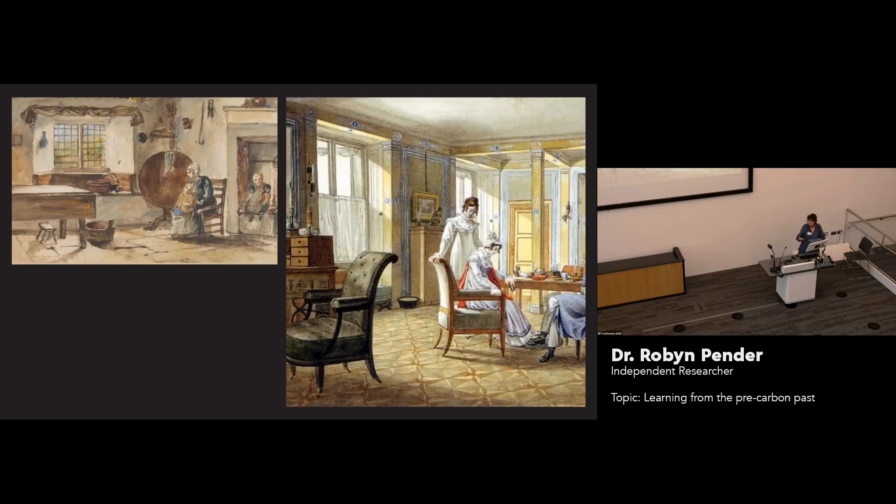Even with wooden paneling, without those draperies and rugs but with big windows, the houses of the 18th century must have felt pretty cold. Count Rumford's grates appeared at the very end of the 18th century, the first fireplaces aimed squarely at thermal comfort rather than cooking. They immediately became incredibly fashionable, and rich people put them in every room, adding massively to London's smog. But they also must have made the houses super drafty and even more uncomfortable.

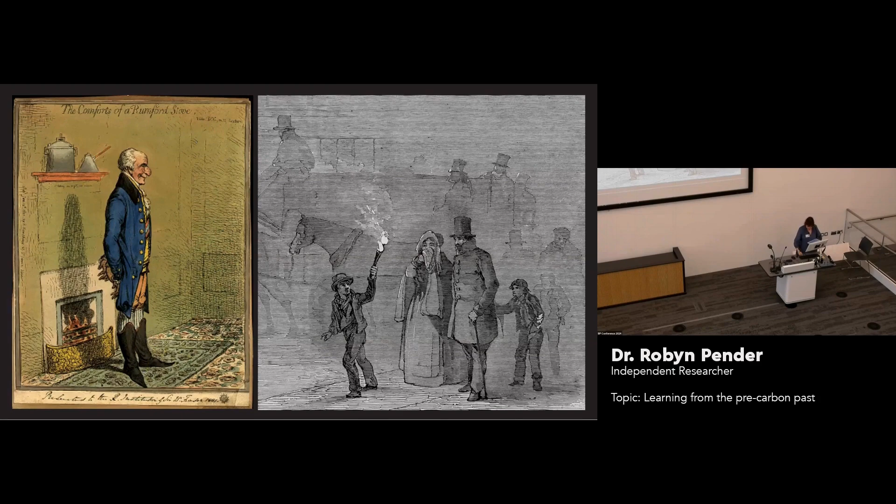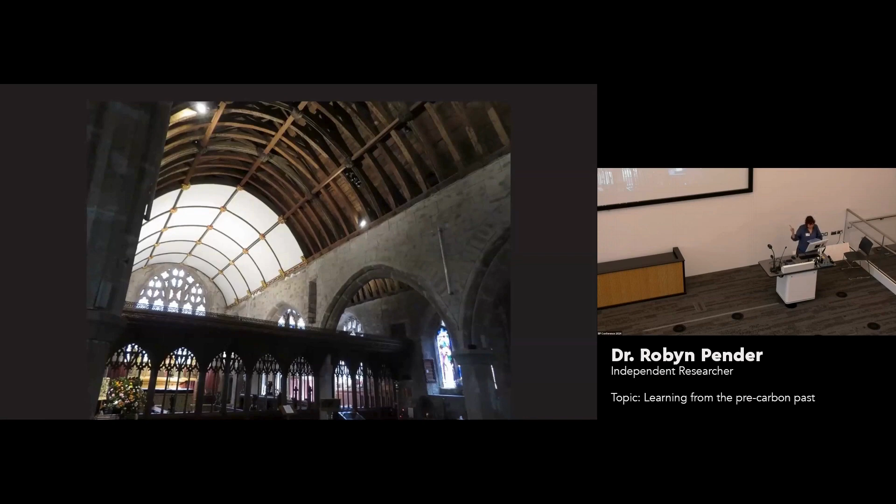So I'm not surprised the Victorians put lots of drapery back again, though they seem to have thought it was just for controlling the drafts. Like us, the Victorians were modernists and gadget fiends, and like us too, they took a weirdly romanticized view of the past, and in the name of archaeology, stripped back the pre-carbon buildings to their shivering bare bones. They stripped off all the lime renders that kept them dry, and even pulled out the ceilings that kept them warm and passively lit, along with other critical fittings like the draperies, paneling and box pews.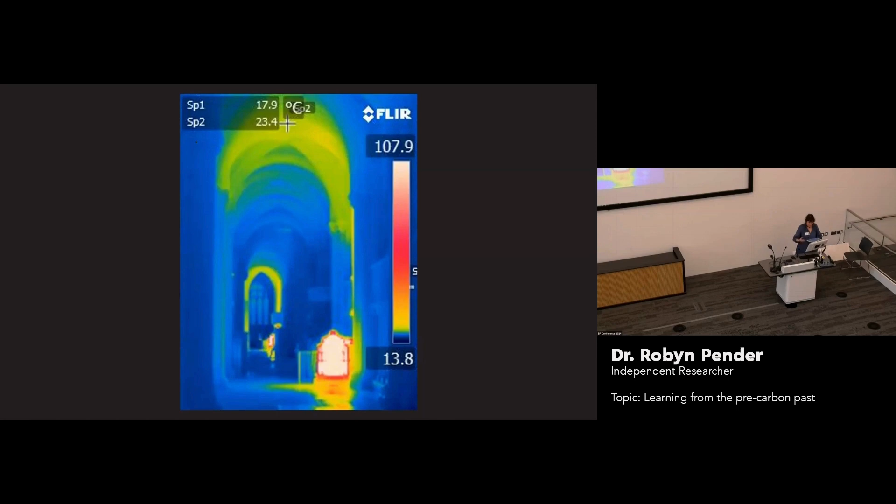Then they added in things like coal-fired stoves. But because hot air rises, air heating has all sorts of unintended consequences, especially in tall spaces like churches, and especially if you've also pulled out the ceilings. Essentially, what air heating has to do to stop discomfort is raise the temperature of all the surfaces so that occupants don't lose their heat by radiation.

You do see early on the thermal physiologists trying to call out the creep of air temperature as a proxy for comfort or health. Leonard Hill certainly knew what he was talking about, and he didn't pull any punches, but he was up against some big market forces.

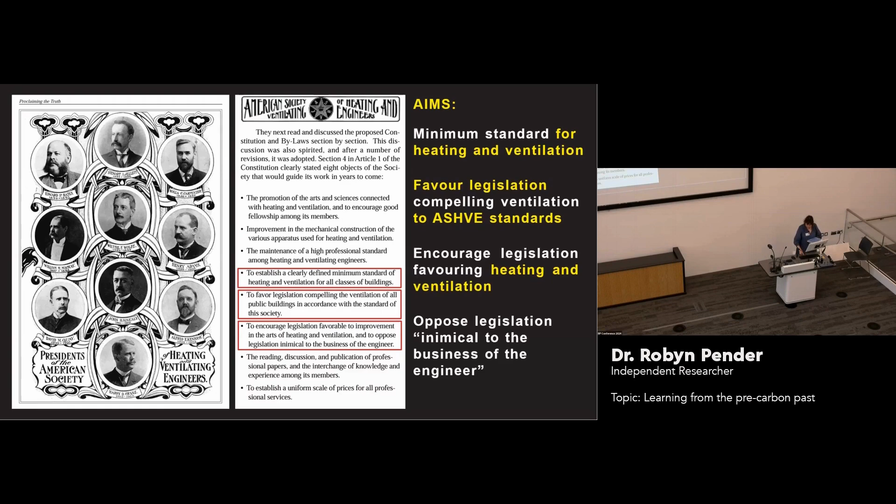This is the first constitution of what went on to become ASHRAE, and I think we can agree that they succeeded beyond their wildest dreams—so much so that we're now in a world where in the US it's heresy, just about a lynching offense, to suggest that anyone can live without air conditioning, especially in a warming climate, even though only something like 8% of buildings have it in the hottest parts of the world.

And that's also despite the obvious fact that on top of all the issues around thermal physiology and comfort, trying to use the air to warm up or cool down the surfaces is incredibly inefficient and energy expensive, because it's so indirect. As the hot air rises, it'll even be evaporating water out from the walls, cooling them down.

So all that's great for manufacturers and fossil fuel companies. Not sure about the rest of us.

The air temperature obsession was codified in the 1970s by Danish engineer Ole Fanger, who decided to try to put a number on the air temperature you need for comfort. Via some very odd experiments, he developed two indices intended to predict how comfortable or uncomfortable occupants would feel under different temperature conditions.

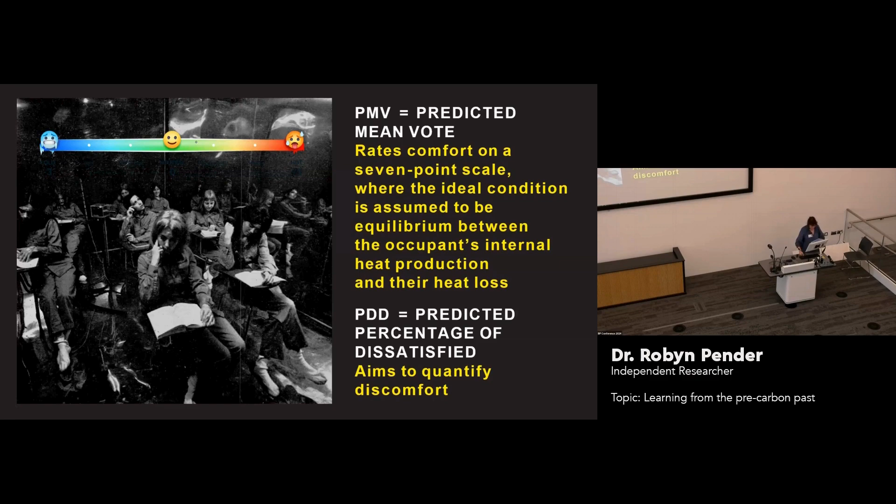Now, the simplicity of that numerical approach of course made it wildly successful, especially with engineers, and it still underpins most comfort standards and the way most practitioners, architects as well as engineers, design interior environments. And of course it underpins our obsession with insulation and sealing up buildings.

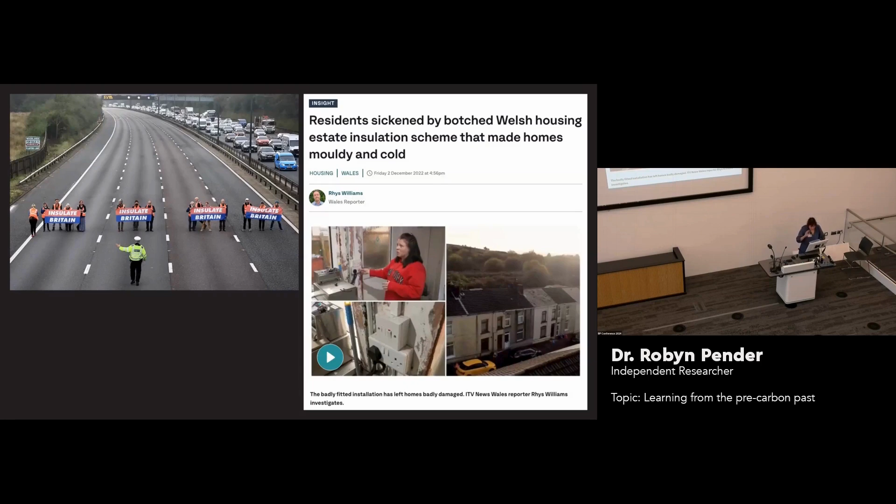But there are some absolutely fatal flaws in the underlying assumptions. For a start, that your surroundings are isothermal, as if you're floating in a sphere made of one material all the same distance away, and that the situation is steady state, which is clearly about as far from the truth as you can get, and also that everyone's the same, which is also demonstrably untrue.

So it's not really surprising—field researchers quickly found there wasn't much relationship between Fanger's predictions and reality. And Stefano Schiavon's team at Berkeley have concluded it shouldn't be used in practice, and certainly should not keep underpinning standards for thermal comfort.

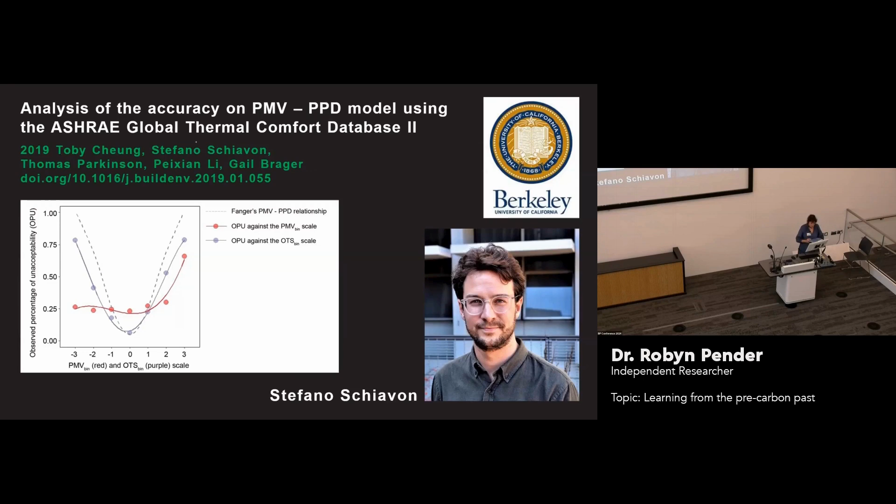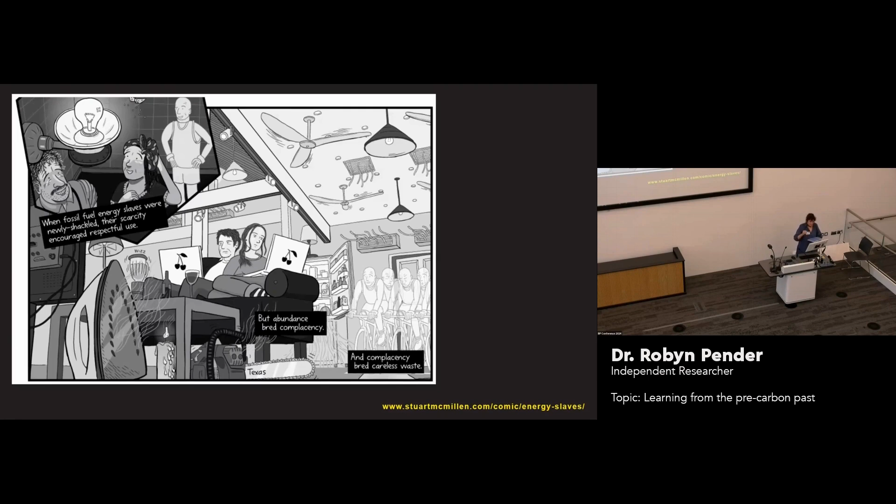So you can see, post-carbon, our solution to our ever-increasing discomfort became just throwing increasing amounts of fossil fuels at the problem. But once that became a problem in its own right, buildings were increasingly sealed up, leading to serious problems of indoor air quality. And again, the solution was hunted for in technology rather than science.

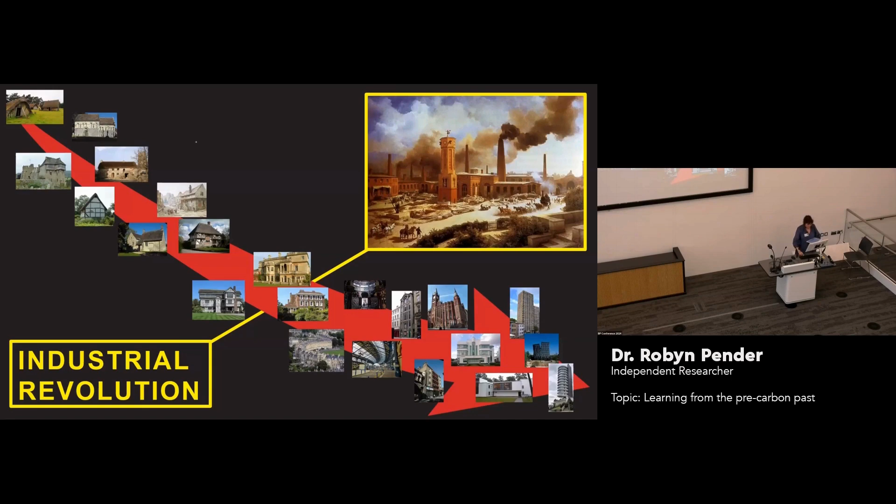Already by the late 19th century, alongside all the new materials and innovative structures, new building specialisms were cropping up all over the place—and we've already talked about this. It led to the increasing codification of building, and as the 20th century wore on, the codes became increasingly fixated on manufacturing practice rather than end results.

The British standards used to be very clear in their small print that that's what they were about—manufacturing standards, not best practice. But looking for the old quote, I see that on their new website that distinction's been entirely lost. And that's terribly dangerous when buildings tend to be now assembled from product catalogues.

We can compare this to the feedback loops that used to exist when you knew your builder and they probably lived a few doors away. So if something went wrong, you hauled them back, hammered their head on the wall and said, fix it. And that's how we learn, and that's how we pass that learning on into better practice.

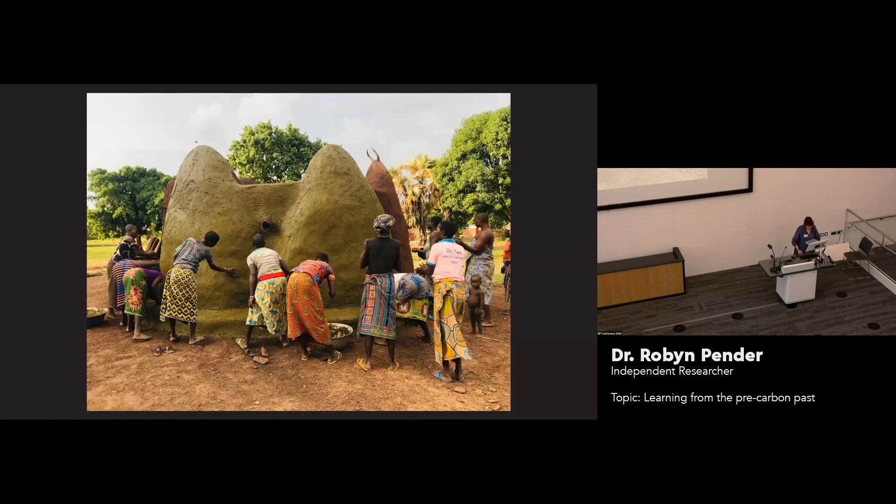So we're now facing the inevitable results of our own very different and very siloed approach. Well, you know what they say about repeating the same thing time after time but expecting a different result.

So I reckon it's high time we stopped, took stock, and considered the wisdom of going back and learning again—not just from our own pre-carbon past, but from ongoing practice in the Global South, which still has a tiny carbon footprint for just those reasons. And our colleagues there can tell you too how very much the pre-carbon approaches to constructing, operating, and maintaining buildings have to contribute to healthy and happy societies.

The great thing about getting away from fabric-first retrofitting and focusing instead on people first is that all those pre-carbon passive systems don't just use very little energy to make and absolutely none to run, but unlike focusing on air temperature, U-values, insulation, they fit with the science and go right to the heart of what's actually causing an individual's discomfort, so they can easily be tweaked for everyone's benefit.

You can make cozy corners for people who are sitting quietly, but without making it horribly uncomfortable for others sharing your space who are being active. And even better, you get an instant improvement, which is really important for comfort. It's all about crises of discomfort, being able to do something immediately to sort that out.

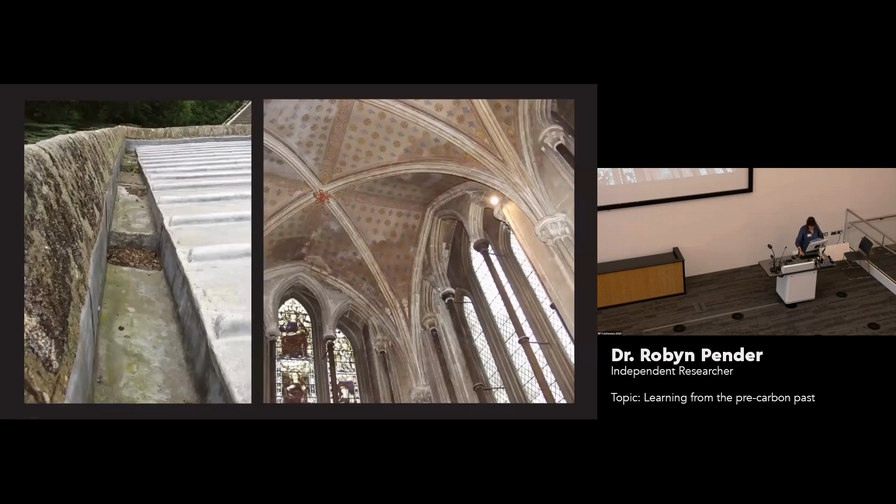Which isn't to say that modern necessarily means bad. Of course, old isn't always a synonym for good either. They came up with silly ideas in the past too, like parapet gutters. And plumbing's great, even if we aren't yet very good at it.

I'm really interested in the potential for replacing window glass, which is a massive sink for radiated body heat, whether or not it's double glazed, with Perspex, which is not. It's a material that could really be a game changer for comfort and prove worth its carbon cost.

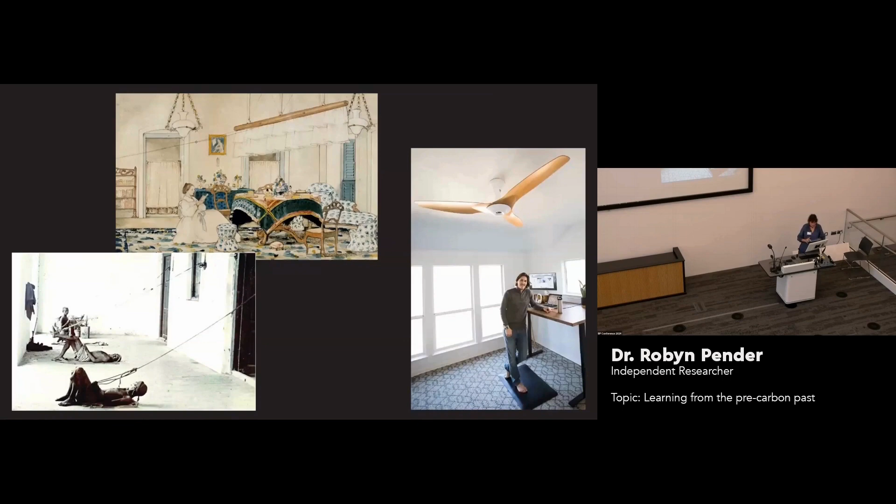Ceiling fans are terrific. They're so much better than traditional punkawallas. And what about all those wonderful modern tools for warming people rather than the air, like heated blankets? These work so well, and they're much safer than old open flames or hot charcoal.

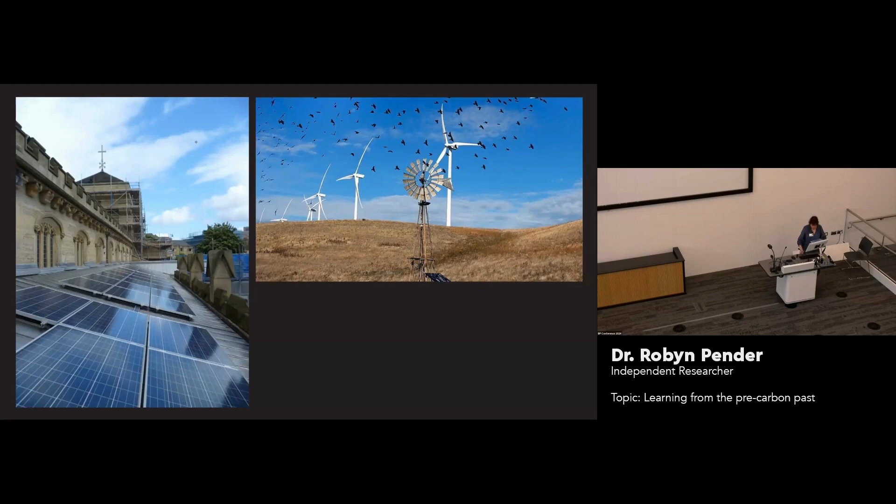And if we can run these people-centered things directly from renewable sources, then we'll really start to get to a better place fast. But the key is to start listening to our bodies again instead of reading thermostats, and actually working out when and why we feel uncomfortable in our particular buildings for our particular ways of living in them. And from that, finding new low energy or no energy ways of dealing with the root causes.

Bill and I are currently involved in a really exciting project run by the Sheffield Diocese, by Katie Steele and Amy Graham at Cherubim. The PCC members who are our co-creators might not be building experts, but they've had no trouble getting this different approach to comfort and discomfort, and have been setting up their own trials and experiments with brilliant results.

It's the same as Freya Wise found in her PhD research in Cumbria, that occupants who really understood how their building worked found ways of operating it that used scarcely any energy. So that's another vital role for BP expertise into the future: finding ways of helping people understand their buildings and learn how to sail them again for themselves and their needs.

It's the holistic viewpoint that counts. Well, that's covered a lot of ground, but I hope you can see how it all hangs together, and that having a building sector grounded in a deep understanding of building performance, of history and science, is absolutely key to solving the problems facing our world.

Everything we do is in and around buildings, so we aren't going to get anywhere we need to be unless we put the built environment front and center in our understanding of the causes of climate change and environmental destruction, and don't blithely keep entrusting solutions to the market. But it's also clear that building performance shows us much simpler, faster, and safer ways of making a really sustainable built environment and therefore saving the planet.